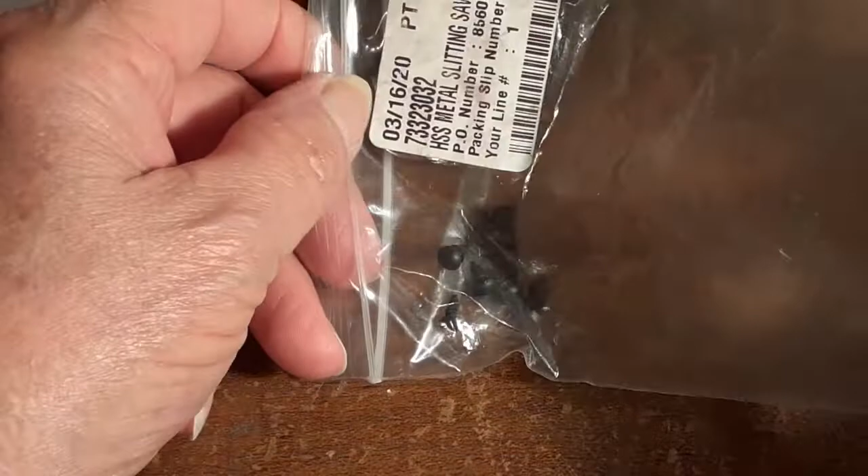I made these little rubber things. Now, if you remember, I said they were made out of 1/16 rubber, and it was a 1/4 inch diameter. And I used a punch that was for putting holes in leather, and I punched these out of a sheet.

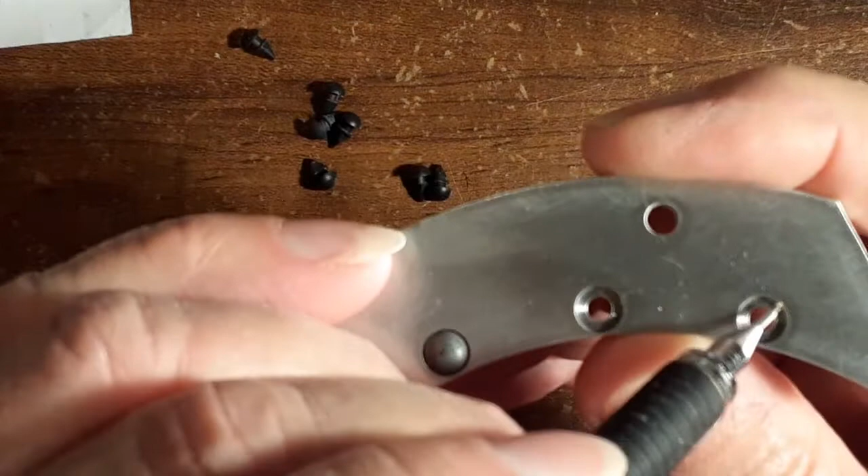And then I had to put these 1/4 inch counterbores in here. There was no hole in the center. They were just a 1/4 inch end mill that went down about 45 thousandths. Then they were epoxied into that hole.

Now that's what I have now in my unit. It looked like this.

Now, these pieces I just made, okay, that'd be this piece and this piece. This is the back jaw. This is the front jaw.

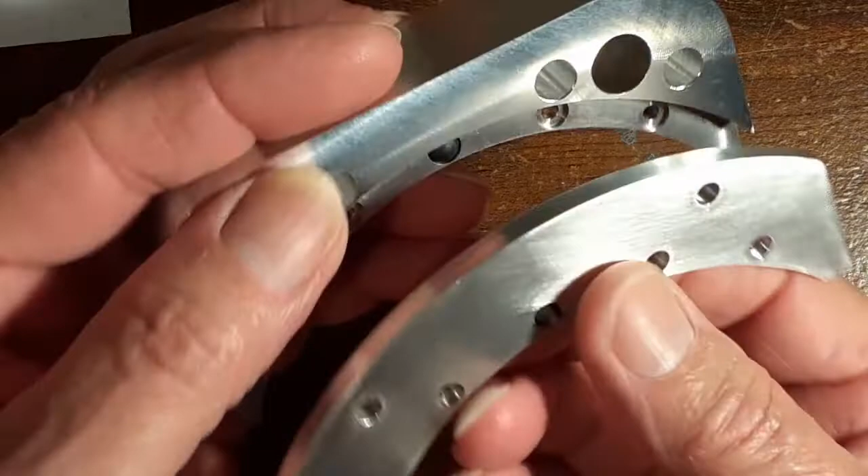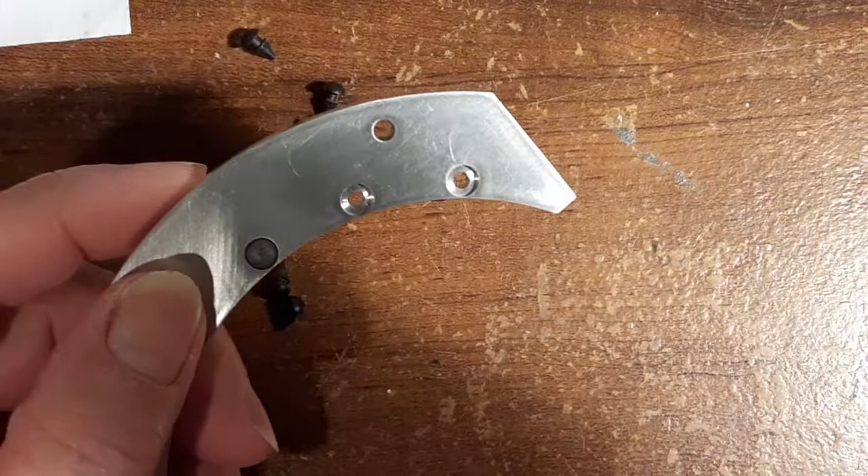But ever since I made these parts, I always wondered about them coming out. And I thought about making some kind of retainer plate to hold those in there, because all I had was, I put some epoxy in there, but you could put some contact cement or whatever.

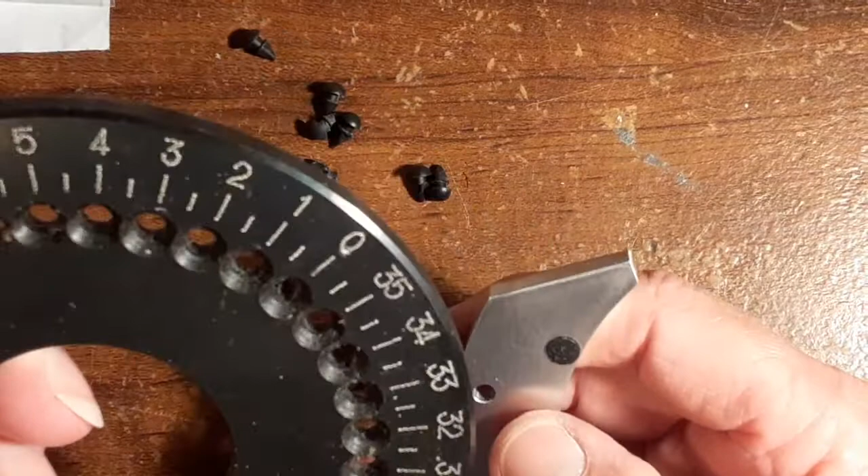But I was always wondering, when you press something against a piece of rubber, sometimes it sticks to the item you're pressing against. And if it's pressing against the circular piece, it might come out. And I didn't want to put any kind of oil or anything on here because then it'll start slipping, and then it kind of defeats the purpose.

But at different times I thought about, well, maybe I could put a hole through there and put some kind of pin in there, some kind of retaining pin or whatever. But I never could really come up with a good idea because it's already so small.

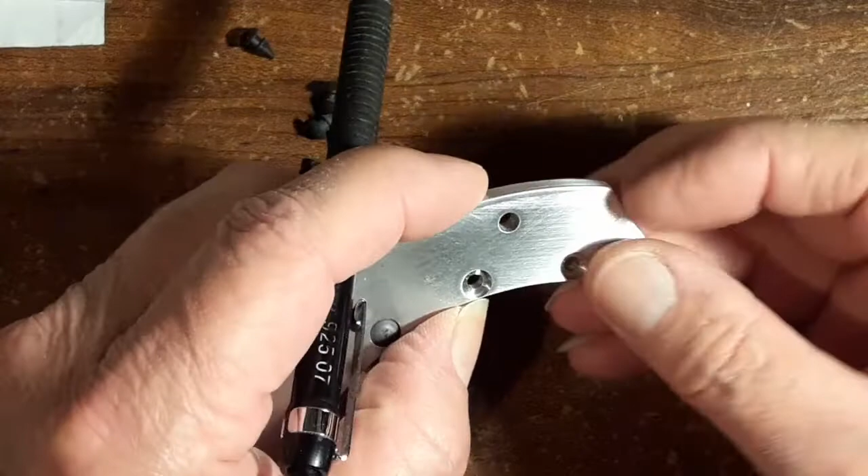So I went on eBay. Well, what happened was I saw these, like on a door, they got these stoppers. You push them into a door jamb, and it stops the door from banging the frame. So I thought, well, maybe there's something out there that I could get that'll work.

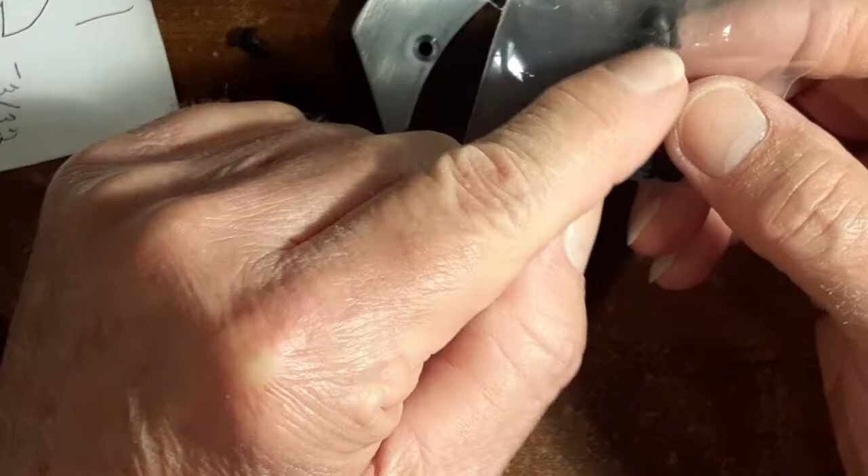So I went on eBay, and I looked at some stuff, and it wasn't too long ago they had these. They got a lot of different rubber products, but they had these ones with an angle on the front where you pull it through a hole. Then it had a diameter that fit into a hole, and then it had a head diameter. And I thought, well, that's just what I'm looking for.

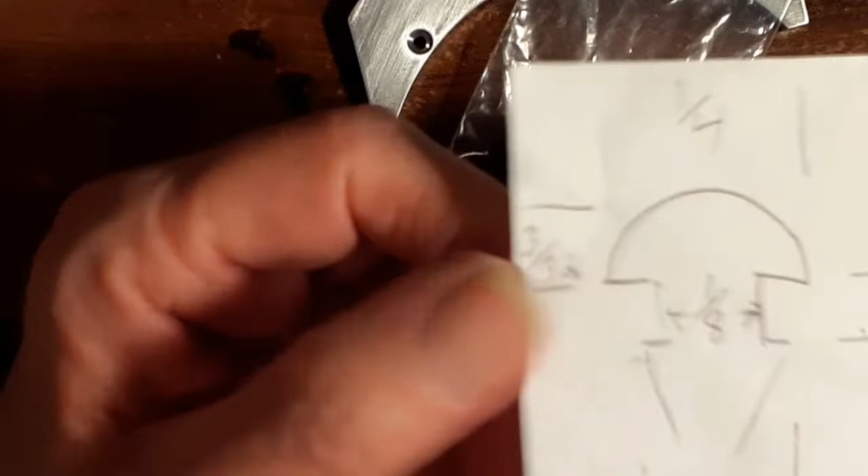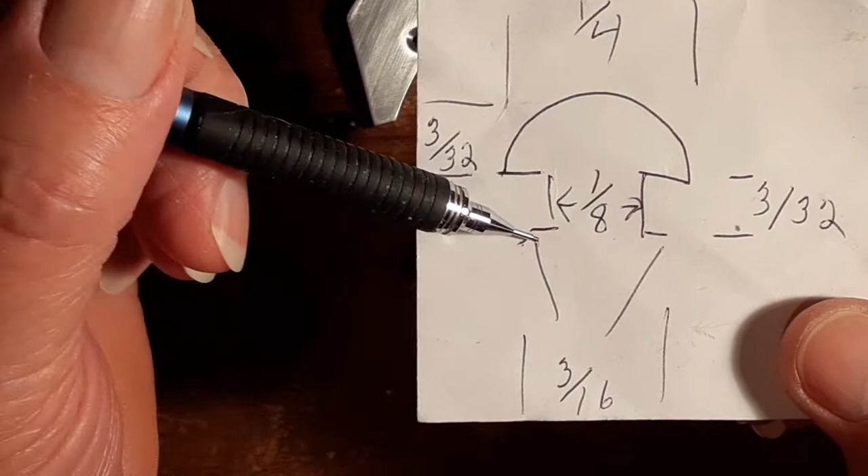So anyway, what it looks like is that it's got a 1/4 inch head diameter. It's got a 3/32 from here to there, 1/8 hole diameter, and it's 3/32 thickness, and then it's got a 3/16 on this side, so you could pull it through a hole, and then this will lock into the hole, and that way it won't come out.

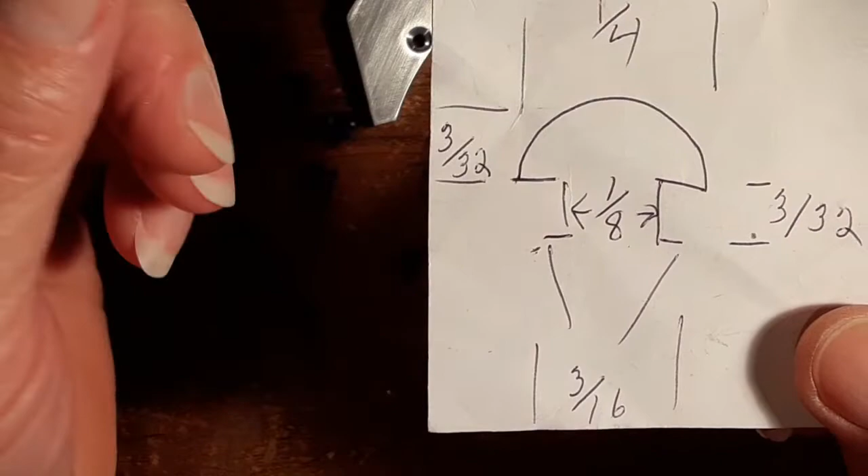And I thought, well, that's a great idea. You know, that's just what I'm looking for. So I ordered them,

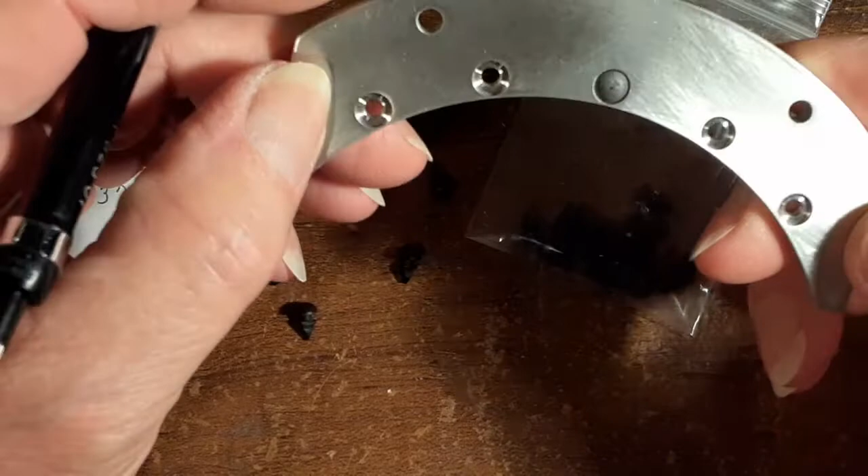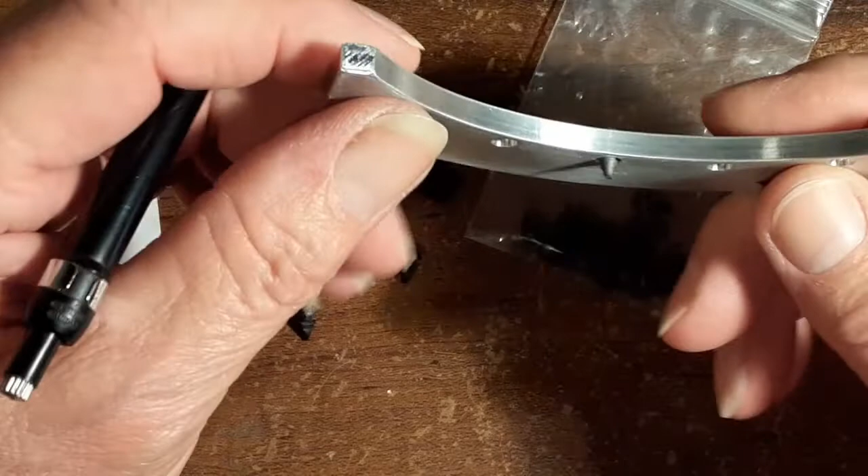and then I made these parts because my unit, you know, it's being used right now at work, and I don't want to tear it down because I'm running a job on it. But I thought, well, if I could make some parts and see, you know, I didn't want to tear the unit apart and then modify the parts and find out it didn't work, because then the unit would be down, and then I'd have to make the parts again.

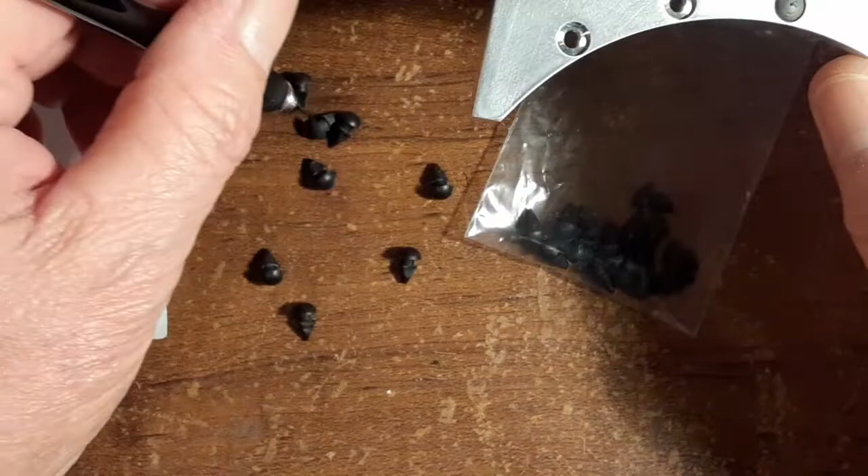So I thought, well, let me make another set of parts to fit these pieces, and that way the unit's still operating, and if these work, then I just change it out. So that's what I did. I made another set of parts,

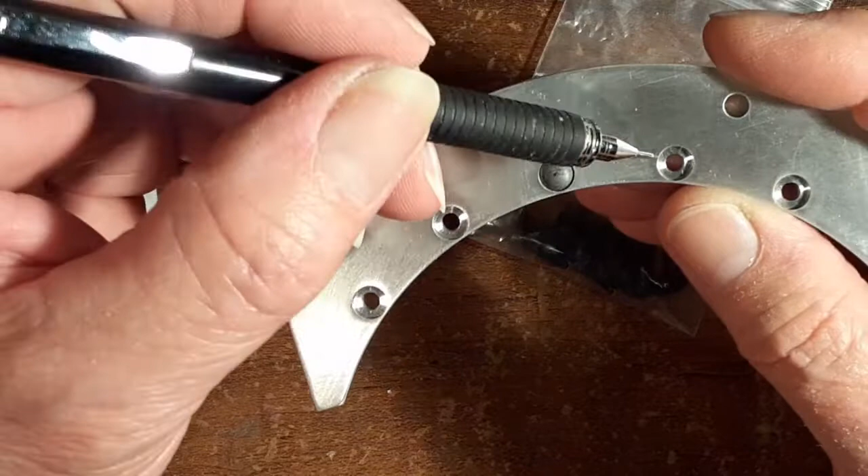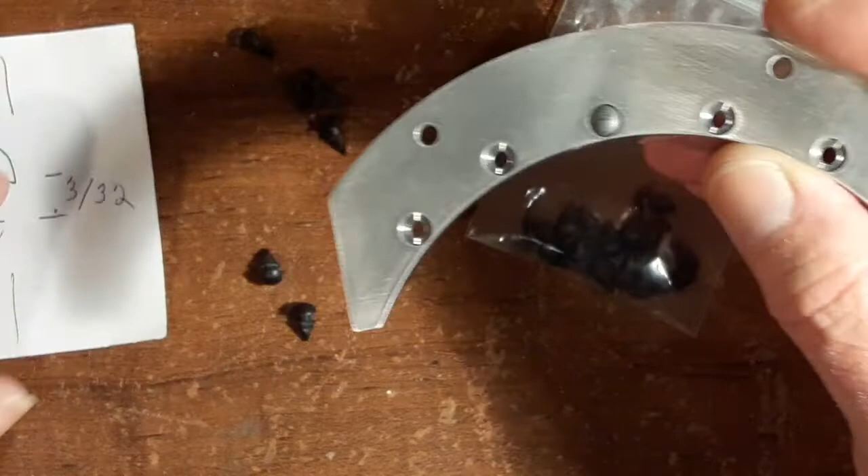and the original went down 45 thousandths, like I said, with the 250 diameter. So all I would really have to do is put a hole through it, a 1/8 or bigger, probably about 128 diameter or somewhere around there.

You know, you want a little bit of looseness, but you don't want it falling through, but you don't want it really tight either. So that's what I did. I made these, and I put a 128 diameter through there, and I went down the original 45.

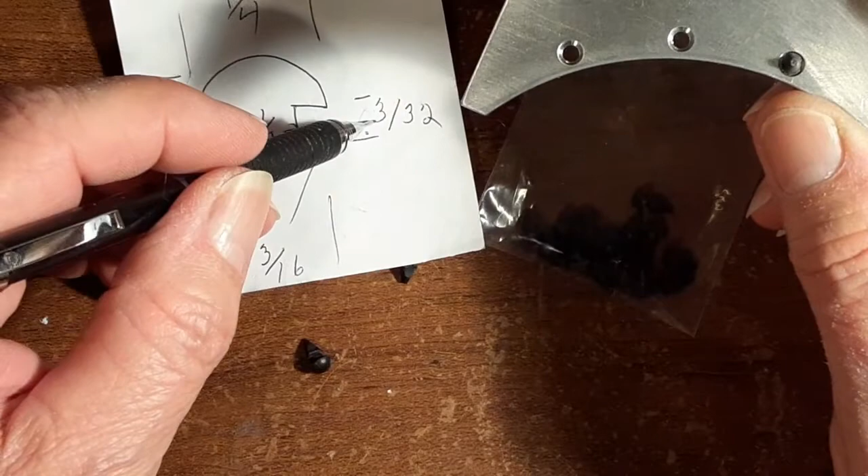Then on the back side, I took a 3/16 end mill, and I went down this 1/4 inch plate. So I went down till I got the 3/32, and so this is about what I did.

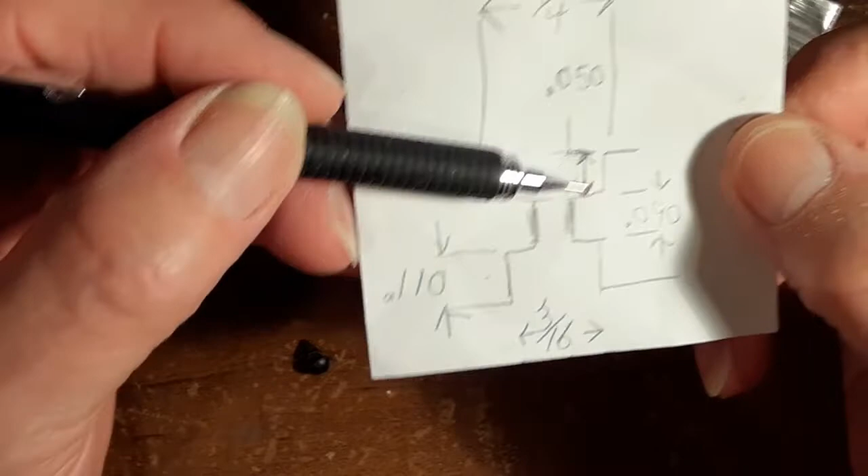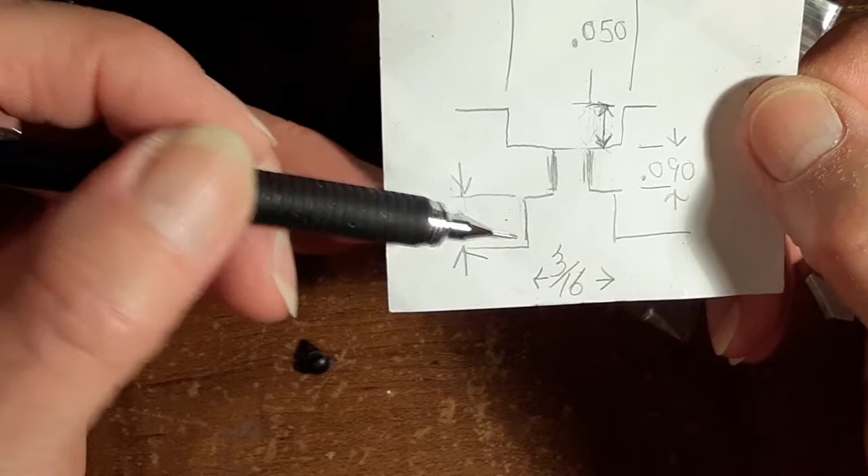The original one is like 50 thousandths deep. It's 1/4 inch. I got a 90 thousandths land in here, and then whatever this turned out to be happened to be 110 with a 3/16 diameter. So that's what I did.

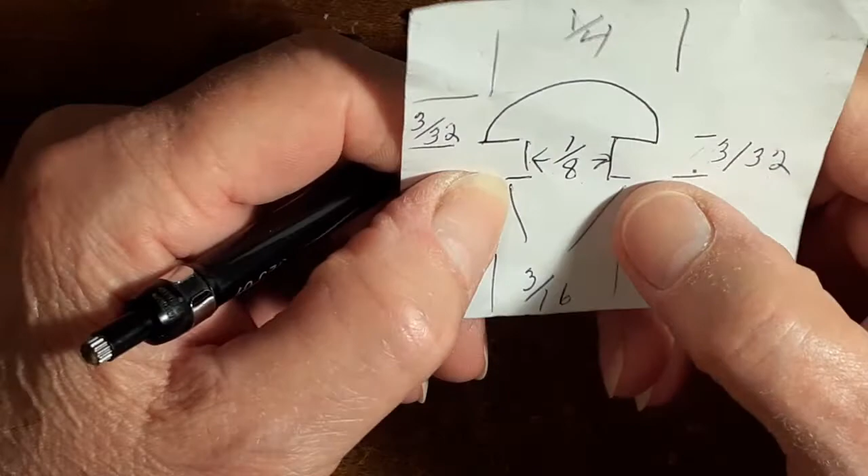I made this part, and I couldn't get the plug in it. You know, no matter how hard I tried, I couldn't get that plug in there because this 3/16 diameter was just too big. It wouldn't let me pull it, stretch it enough to get it in the hole.

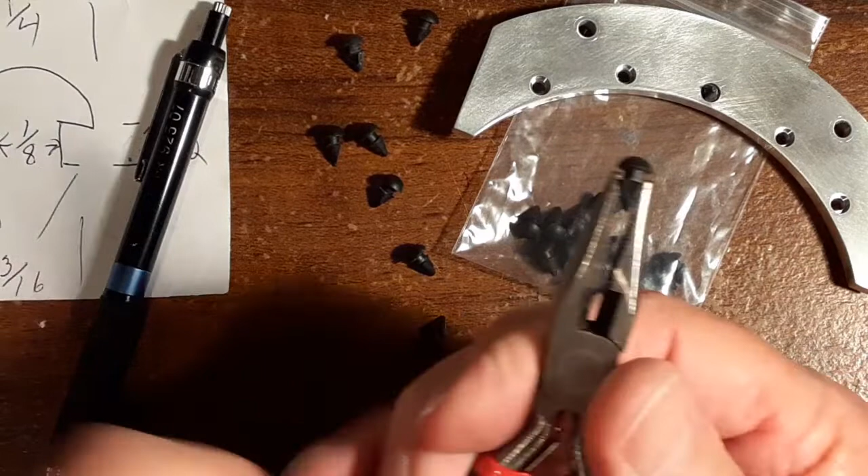So what I did was I held this in a pair of pliers, kind of like this here. And I took a razor blade and I just skimmed one side. A knife doesn't work, you have to use a razor blade. But I skimmed one side, and I flipped it over, and I skimmed the other side.

Now you're not cutting this piece here, you're just cutting that angle piece. So what you have is the round part with basically two flats on it. I don't know if you can see that.

So what you're doing is the only 3/16 is on one half of it, and then 180 degrees is the other 3/16. So what you're doing is you're making this easier to fit into something because you're reducing over half the material. But these two areas where you didn't cut, you still have the 3/16 diameter, and that'll hold it in place. So that's what I did, and it worked out good on one.

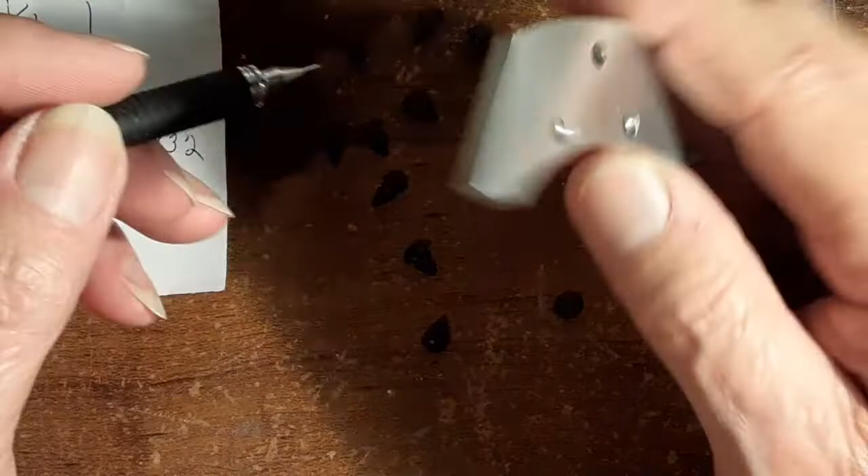So I said, well, yeah, it worked out good. I got it in there. So then I cut the rest of them because I need 10. 5 for this part, and then 5 for this part. 1, 2, 3, 4, 5. So I got this one in.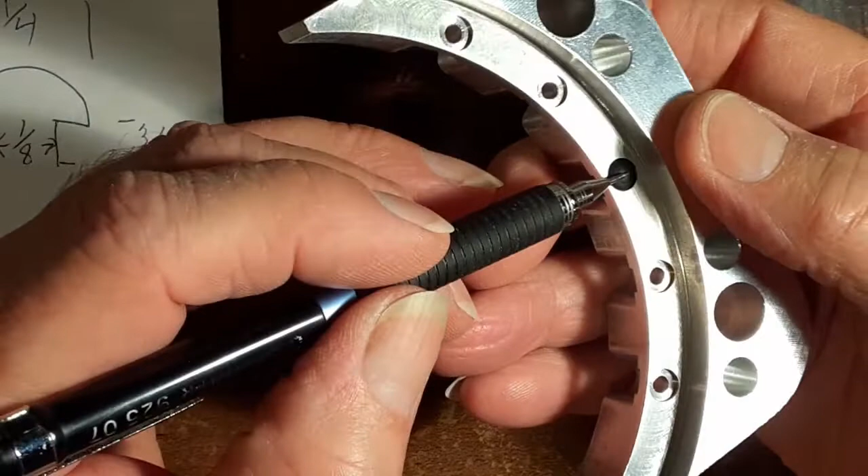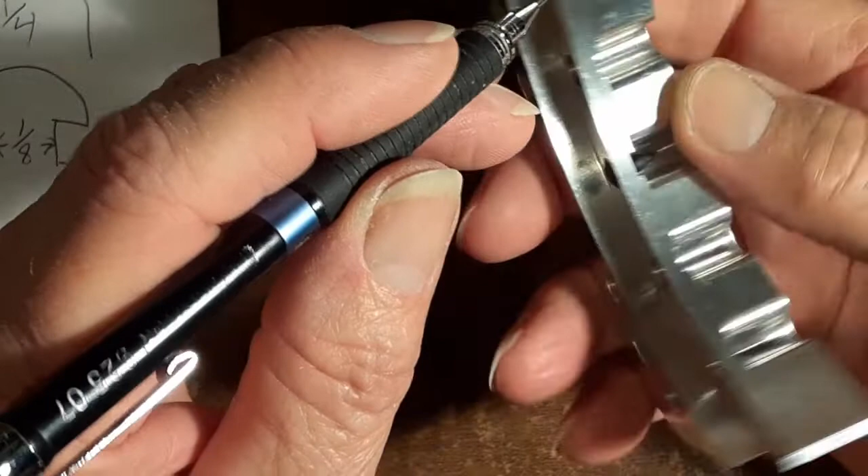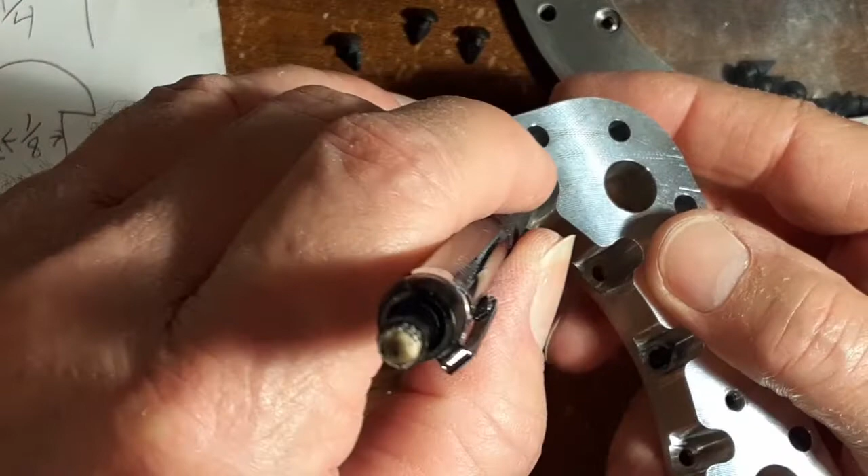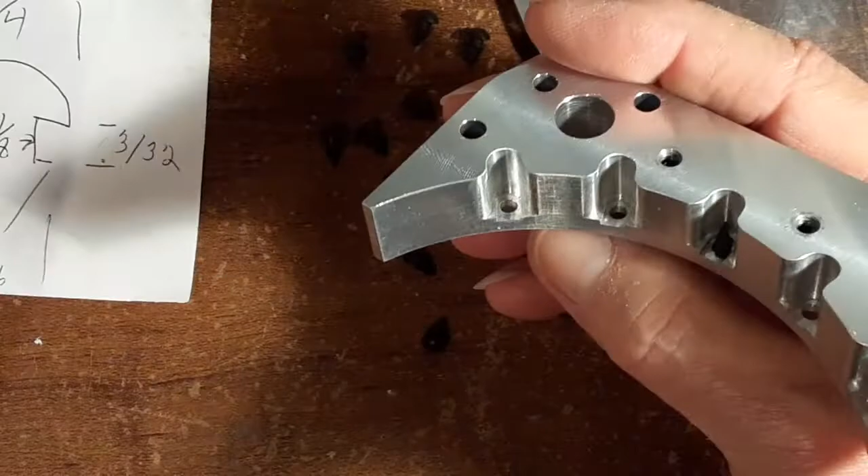And what I did back here was I did the same thing. This is down 45 thousandths. Then I went down here with a 3/16, and I made that so there's about a 90 thousandths land between the front and the back. And then this in here, that's just clearance. Used a 1/4 inch end mill, came in there, because you have to have room to get your pliers in there to pull that guy through. So that gives you plenty of room.

I mean, you could bring that back, as far as you want. But I didn't see any need in it. I just need to bring it back far enough to get the pliers on it to pull it through. So that's what I did.

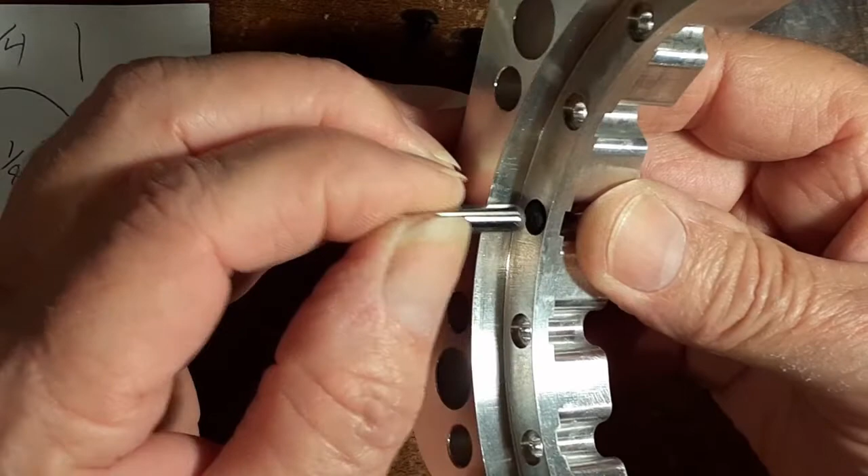And as far as the surface sticking up, I mean, you got about, well, it says 90 thousandths sticking up, and you got 45. But the little dome on top, I mean, is where this piece, the original piece, was 1/4 inch, and it was all circular, as in one thickness. This is domed. So when this brake first engages, there's very little area for that to hit on. So that's going to compress even more. And as you go further down, it's going to increase the pressure because now you're getting into a bigger area.

As you go down, the point of it is not much. It's going to compress easily, but as you go down further, you're getting into a bigger diameter, so it's going to take more force to compress. So it's obviously sticking up quite a bit further than that one.

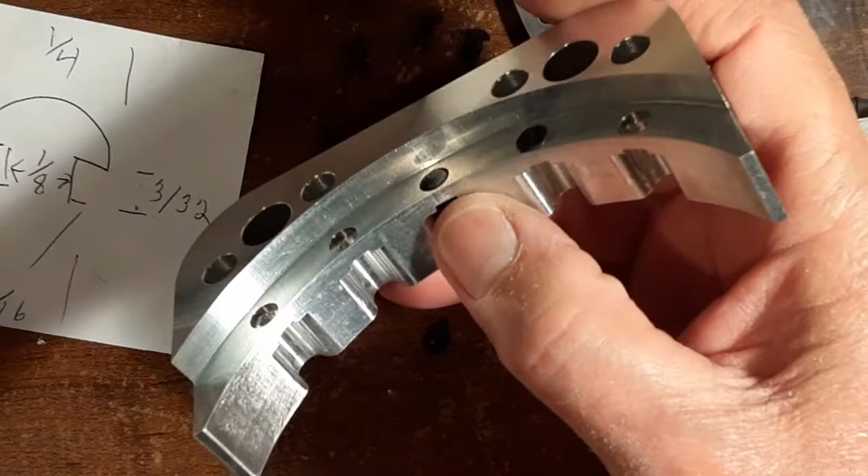But as far as the pressure to compress it is about the same. I think the end result is going to be the same, because this original one, you're going to go down maybe 5 thousandths. I don't think you're going to go 10. But this one here, I mean, when you first push it down, it's going to go down 10, almost 15, but you're going to end up with the same result. You're not going to hit the aluminum piece.

Yeah, the original piece was made out of Delrin, and I decided to go ahead and make this out of aluminum.

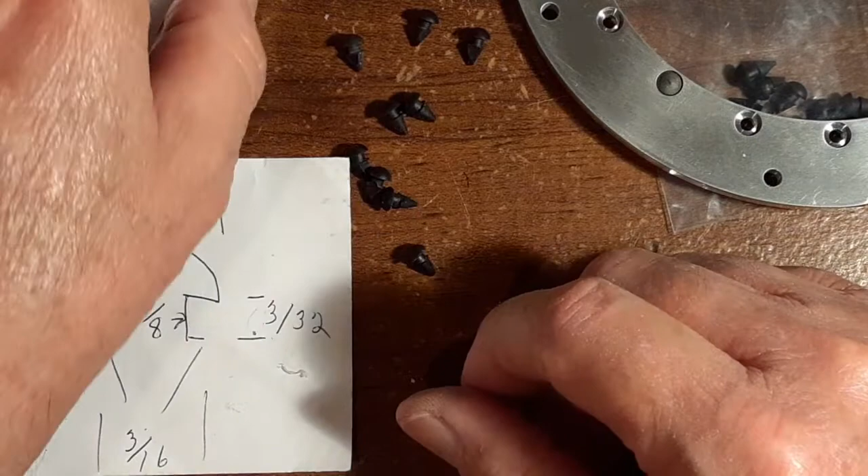But what I did was I cut all these, and I'm going to install them in here. And then when I get a chance, I'm going to take the other ones off the machine and exchange them for these parts, because I don't want these parts coming out.

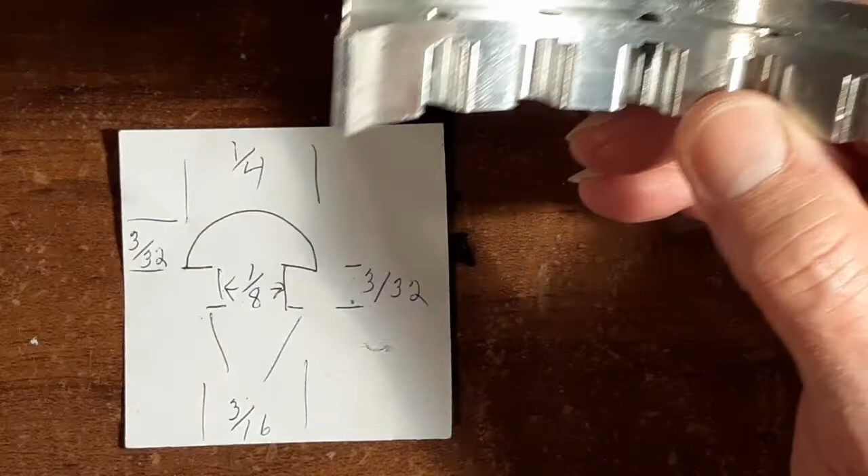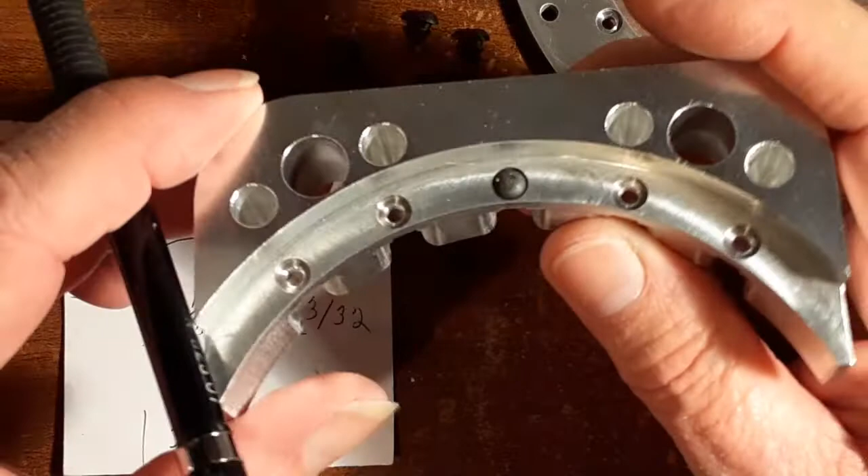So being how they're captured with this hole, I think it'll be one less thing to go wrong. So that's what I'm thinking. But we'll give it a shot and see what it does.

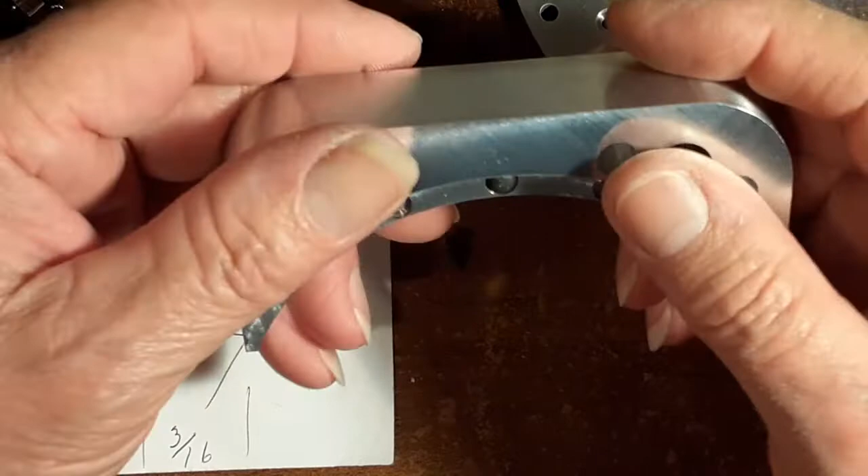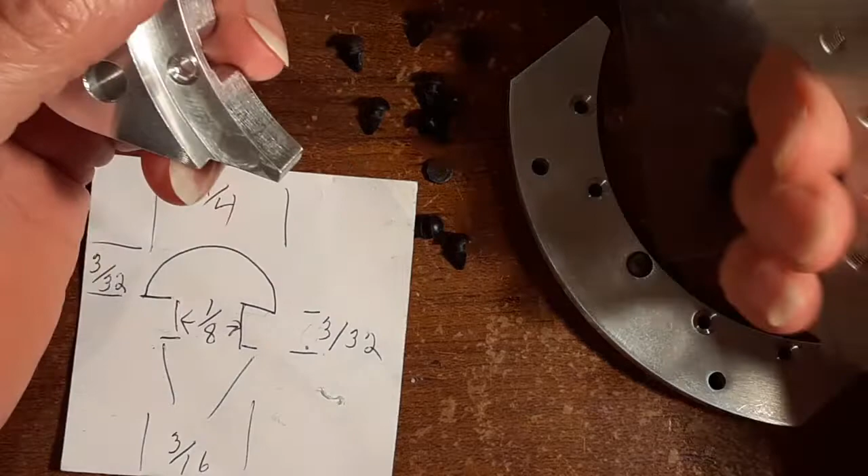All right. Yeah, I made the aluminum front piece, the aluminum back piece. I made aluminum mounting plate too, so that they all fit together.

The other ones, like I said, were Delrin.

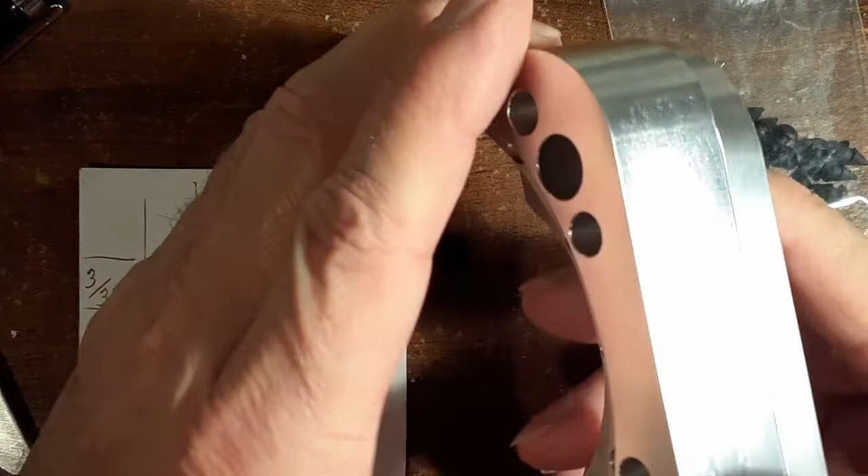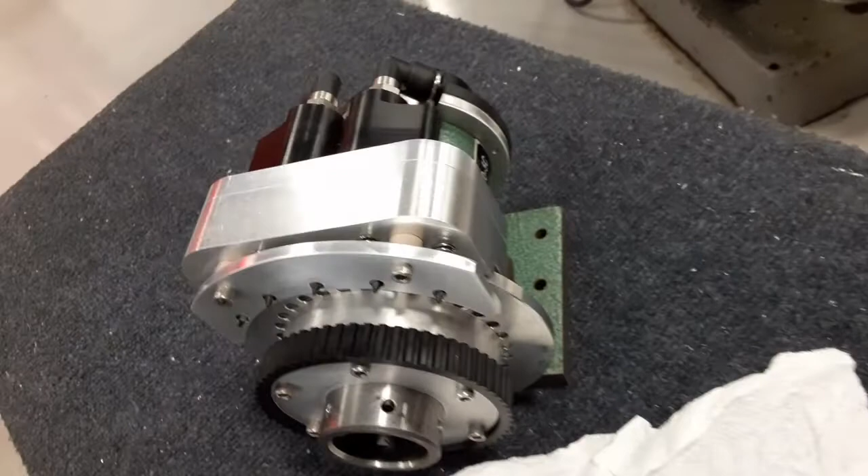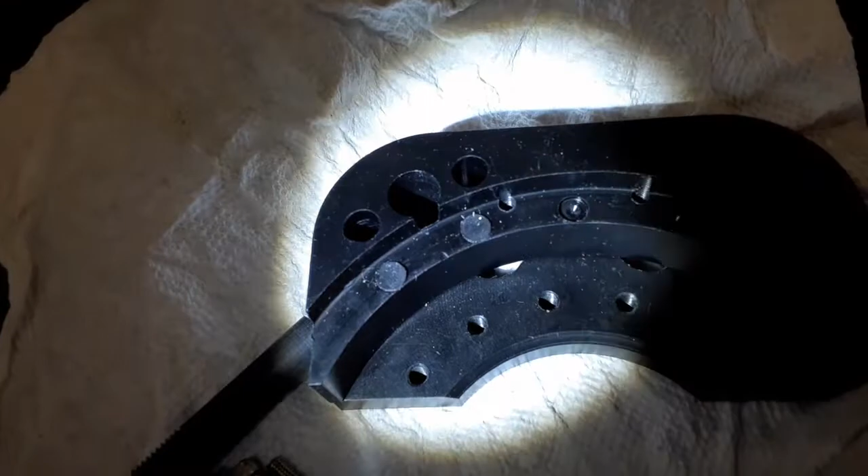So we got to a stopping point. So I took this thing off, took it apart, changed out the old parts for the new parts. Now these are the old parts. Now you can see I was missing some of those circular things. I have 2 on there, and I'm missing 3.

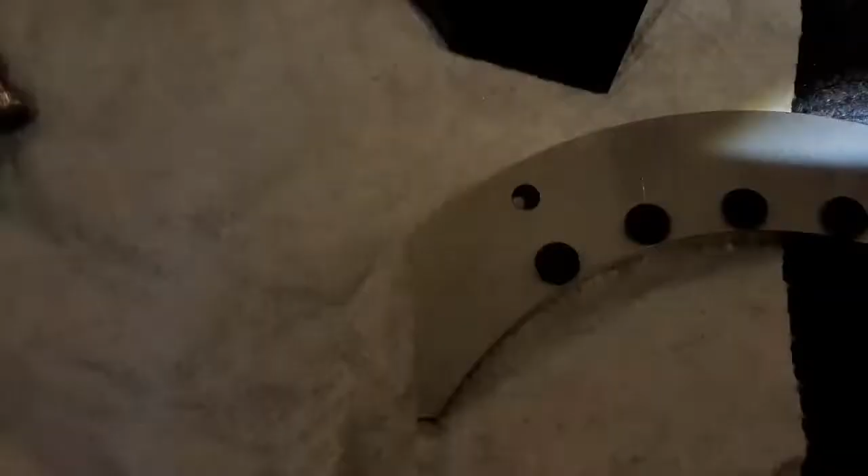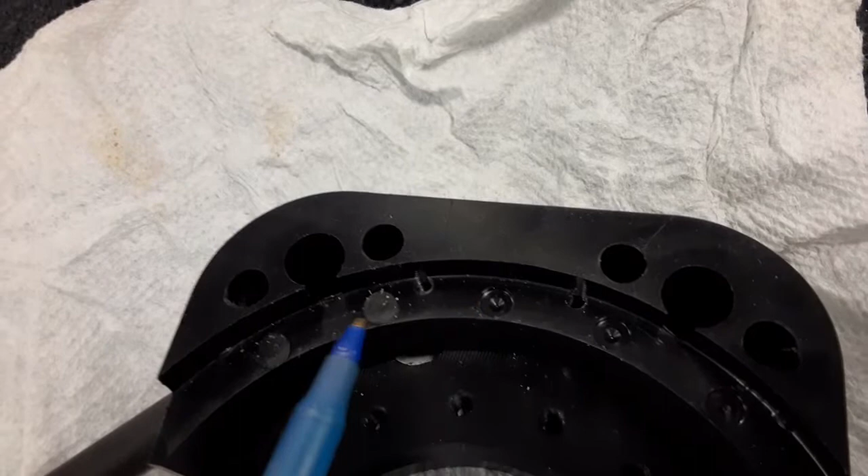Now the outside piece, they were all on there, but the inside piece, I got 1 here, 1 there, and I was missing 3. The unit was still working with just 2 there, but what happens is it puts it in a bind because one side's pulling further than the other side.

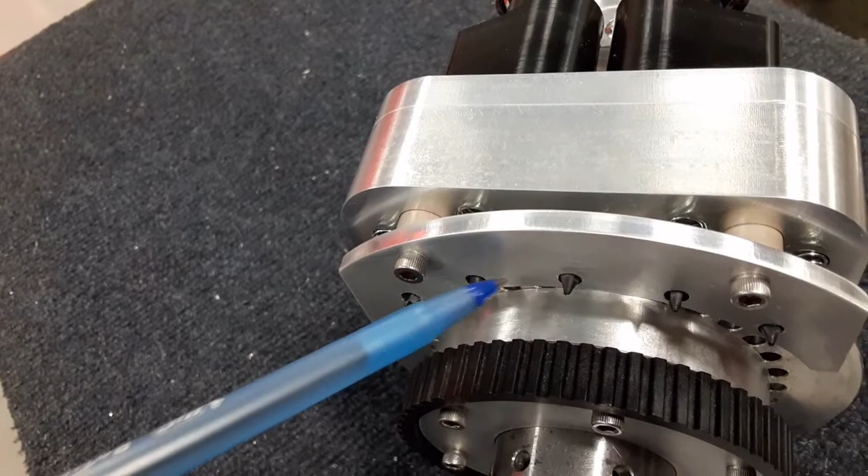So anyway, with the new unit installed, now you can see where I had to pull these little pieces through. This doesn't hurt anything at all. They're just out in space.

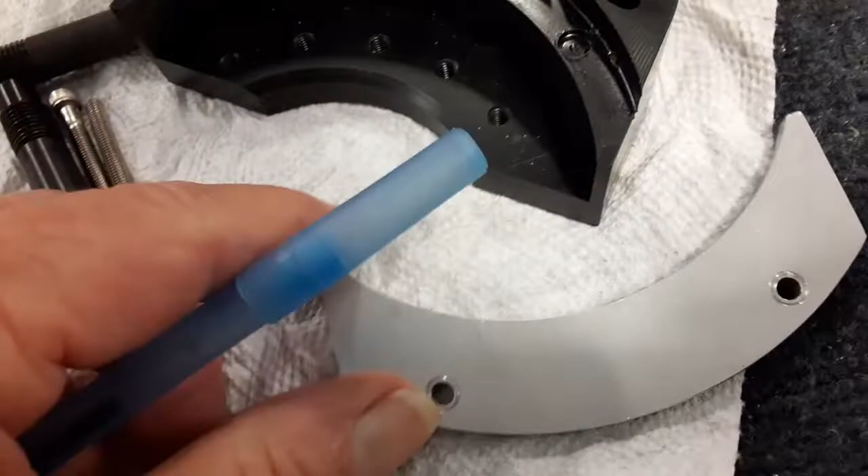So we're anxious to see how this is going to work out. I'm sure it'll work out a whole lot better. But so I'm glad I took that apart. Glad I was able to change those out. Put in new parts. So that's going to work out really good.